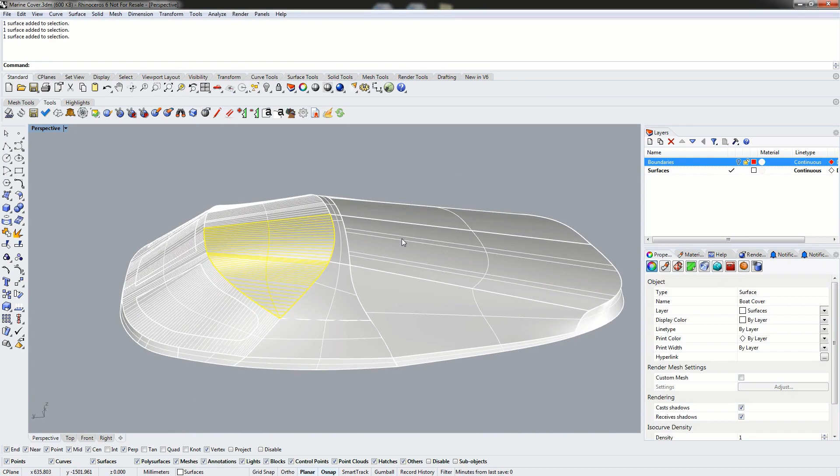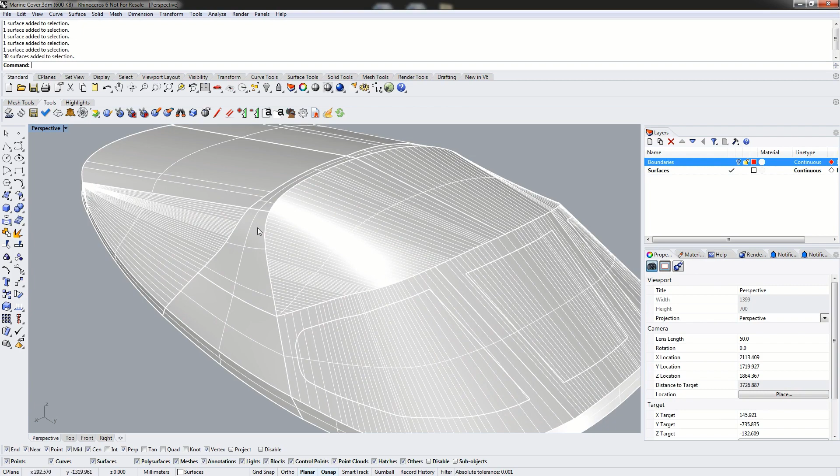This cover came in as a collection of surface objects, so our first step is to join everything together and create a single poly surface. Although we want to flatten this as multiple pieces, we're not just going to flatten surface objects. We're first going to create a mesh from it and then use the adaptive remesh to condition our mesh before flattening. So we're going to join all these pieces together to form a single poly surface object, and then create one single mesh out of the poly surface object. The reason we do it this way is so we have very clean preserved edges between all the different surfaces. If I were to select everything, we've got 30 surfaces here.

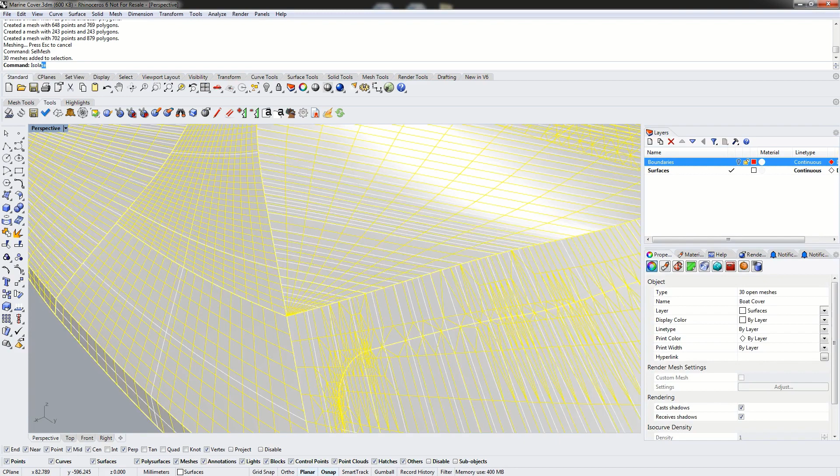If I were to create a mesh out of this, I'm just going to use simple controls, more polygons, and click OK. If we start to examine this mesh using SelMesh, Isolate, we're going to hide all the surfaces and just look at the meshes. If we look at the boundaries between these meshes, none of them line up. None of these quads are lining up when we mesh this separately.

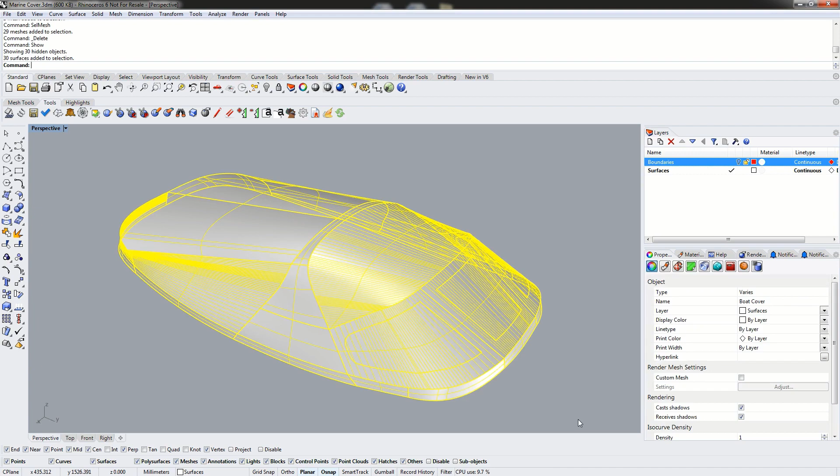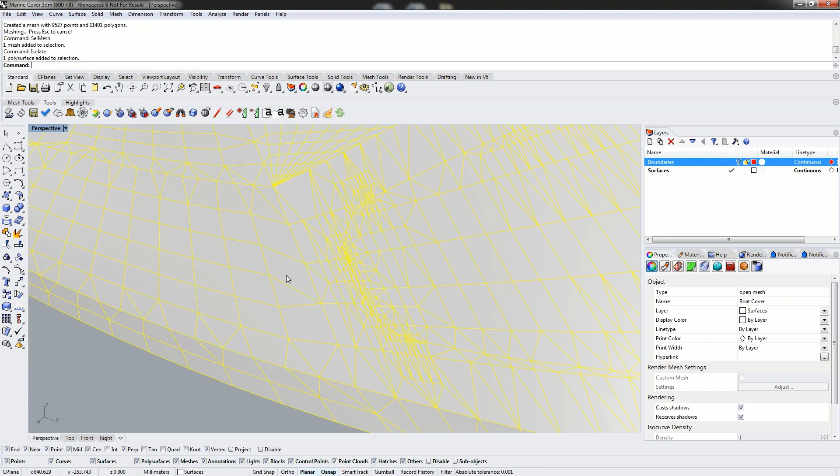The reason we join everything together - when we don't join it together, we don't have aligned boundaries. So we're going to join it together first, and now if we create a mesh, again using more polygons and clicking OK, and start examining the boundaries with SelMesh to isolate the mesh, everything lines up. So we've got a much better mesh now, and this is going to greatly improve the reliability of ExactFlat's sewing algorithms for when we create our new mesh using the adaptive remesh. ExactFlat will be able to recognize the boundaries, sew them together, and preserve those boundaries. That's why we join everything together to create a single poly surface first before we create a mesh.

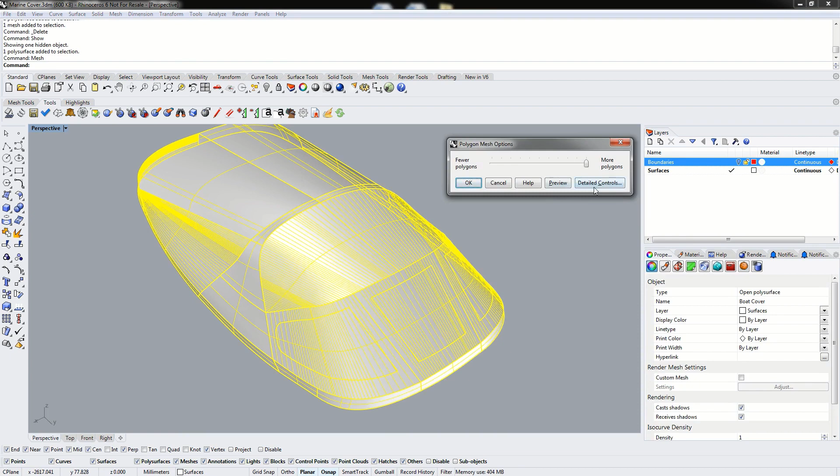So we're actually not going to keep this mesh here. There's a couple characteristics that I don't like about this mesh, so we're going to delete it. We're going to use show to reveal the surfaces again, and use the Rhino mesh tool again, but instead of using simple controls, we're going to switch over to detailed controls. This cover was modeled in millimeters, so as we move our mouse we can get an idea for the scale. We're going to manually set our meshing tolerances here.

As a general rule, I always set the maximum aspect ratio to 2. That just means our longest edge is going to be at most twice the length of our shortest edge on the quad or triangle. This helps to control and minimize high aspect ratio triangles. Just moving the mouse here, we're always going to start a little high. I'm going to set my maximum edge length to about 100 millimeters and my minimum edge length to 10 millimeters, and we're going to click preview.

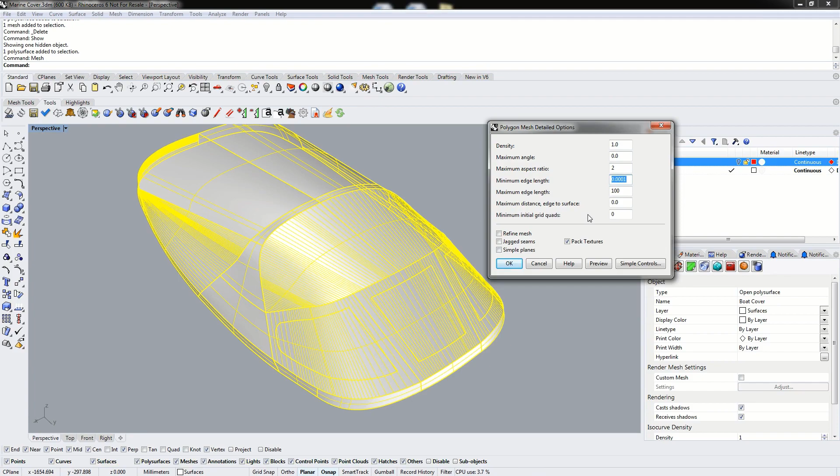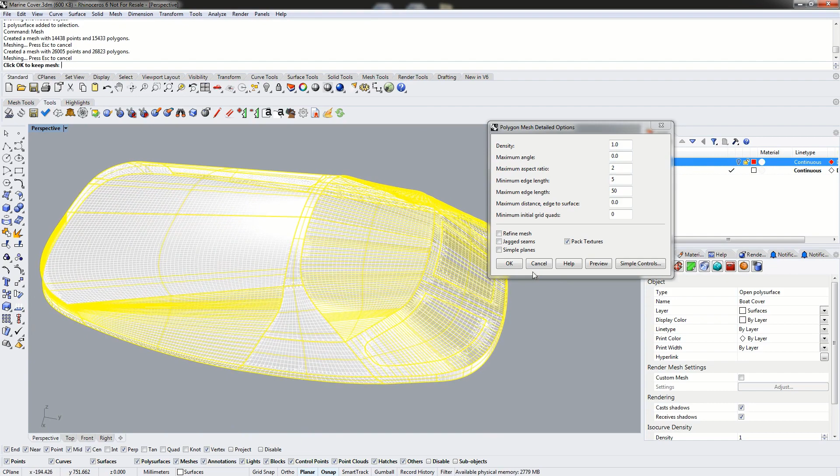This gives us an idea for whether we need to increase or decrease these values. I would like to see a few more triangles with quads along here before I use the adaptive remesher, so I'm going to change these to 5 and 50 - cutting them in half. We'll do the preview, and we're hopefully going to be doubling our triangle and quad count here. Our mesh is looking a lot better now already, so we're going to click OK.

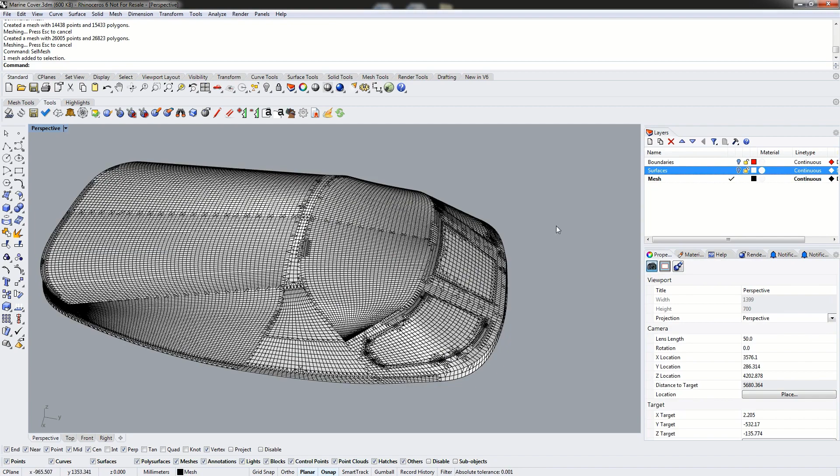Standard best practice is to always keep your different meshes and surfaces, any kind of work you do, on separate layers. So I'm going to create a new mesh layer here, use the SelMesh command to select my meshes, and change them to the mesh layer. Now I can turn off my surfaces and only view the meshes. So we've created one single mesh from meshing one single poly surface.

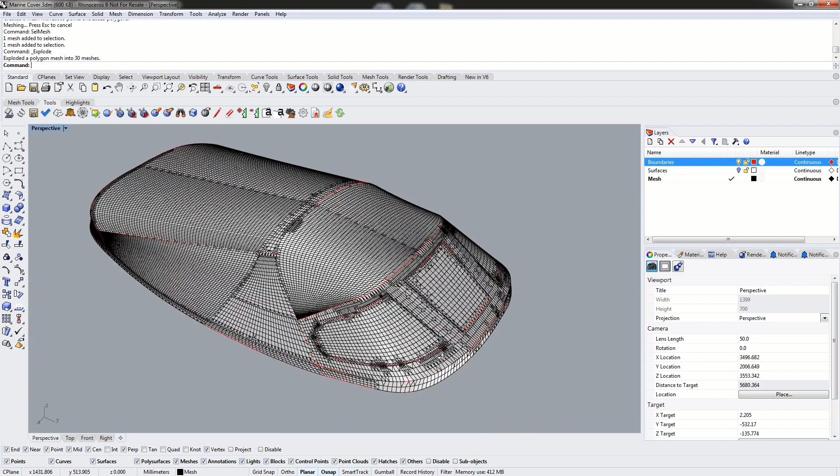So our next step is to explode this mesh so we can rearrange the pieces into component pattern pieces. Before we started looking at this, I duplicated the boundaries of where we want our pattern pieces to go, so we can highlight them in red, making it a little easier to select the pieces for creating our pattern. We can see our boundary right across the top here. So I'm going to start selecting my mesh and join these together as one single pattern piece, and we're just going to repeat the process for all the pieces that form our pattern.

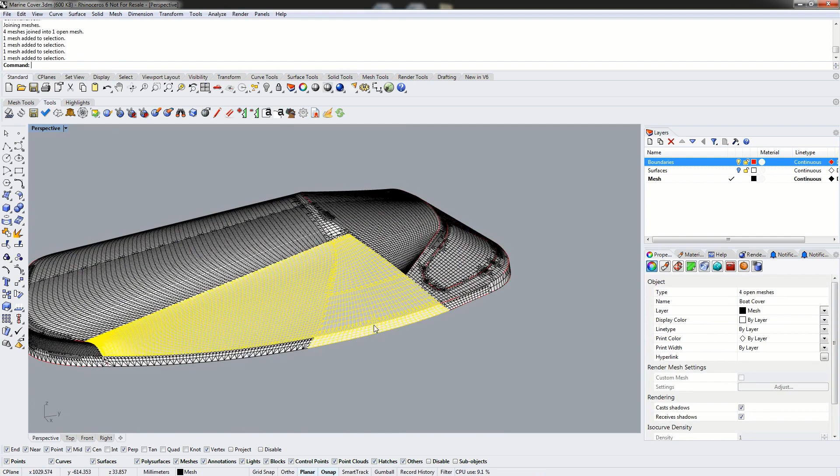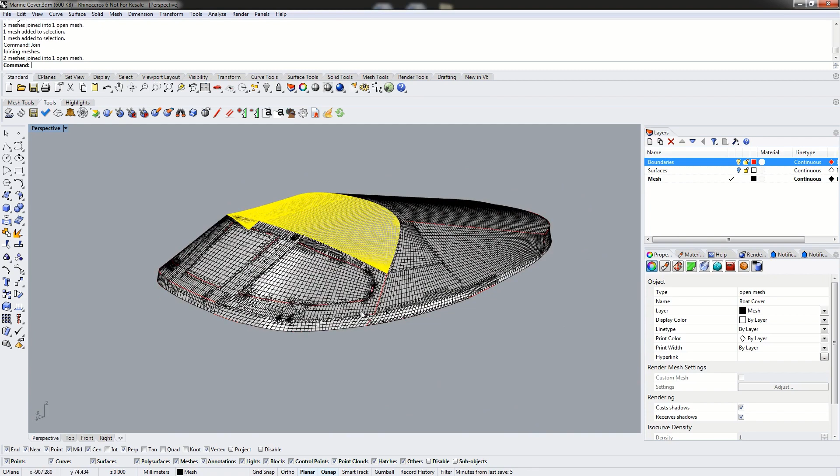Join those together, join these together. Join the right and left half of these together. And we're actually going to join all these together too. So this would be the windshield here. We can actually see where the cutouts are. And I actually identify these as a boundary that we want to keep.

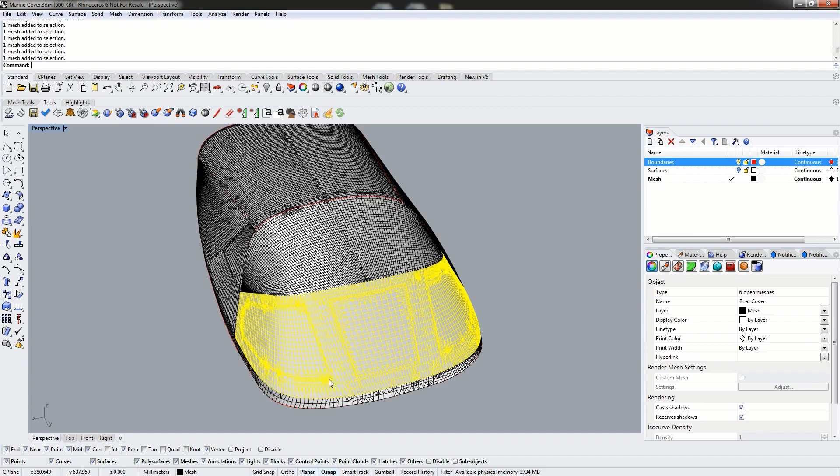However, for flattening, it's much easier to actually fill these in. And what we're going to do is we're going to use the ExactFlat trace command right here, and we're going to trace this boundary profile back onto the pattern piece after flattening. So for flattening purposes, we're going to join all of these together into one single sheet.

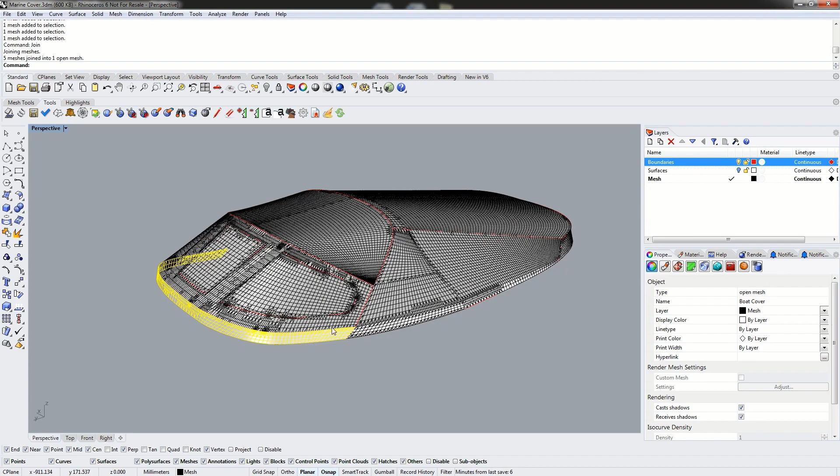And then lastly, we've got our pieces down here along the bottom. And we'll join these together as well. Now we'll just do SelMesh. We've got 7 pieces, which is what we should have. So we've got all our pieces joined together now.

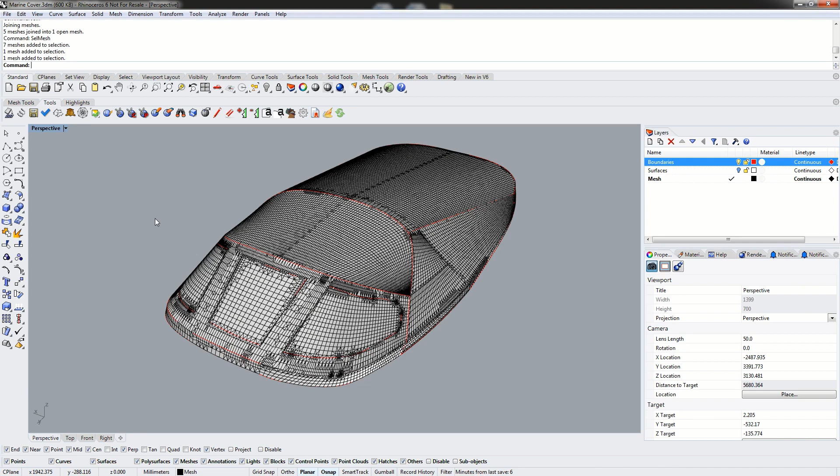So when we created a mesh from the poly surface, what happened is it created individual meshes for every single surface, and then it just joined them all together, very much the same way we did here. And because we had independent collections of vertices and triangles, one independent collection per surface, when we use the explode command, the command actually goes out and searches for those collections, and it's going to break them out into separate meshes.

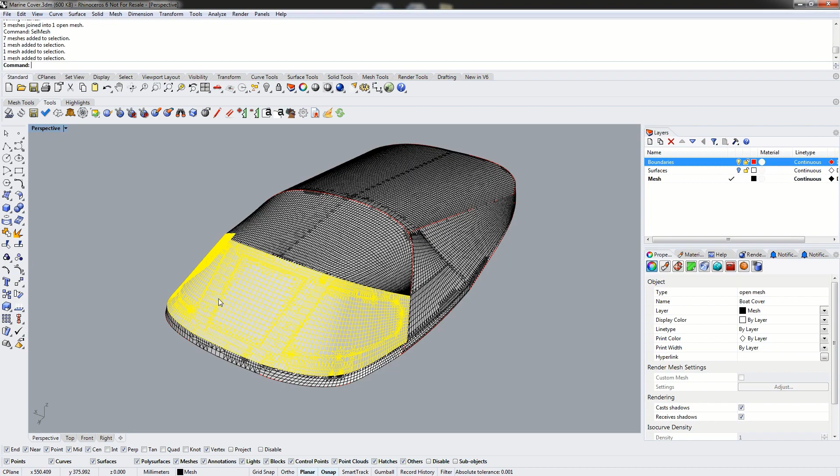So if I were to explode these, I would again explode them into 7 different meshes, or however many meshes we have here. And similarly, if ExactFlat were to try and flatten this, it would again explode them into the individual component pieces. So what we need to do is eliminate all the duplicate vertices and merge all these independent collections of triangles and faces into a single collection. And the way we do this is with the Rhino weld command.

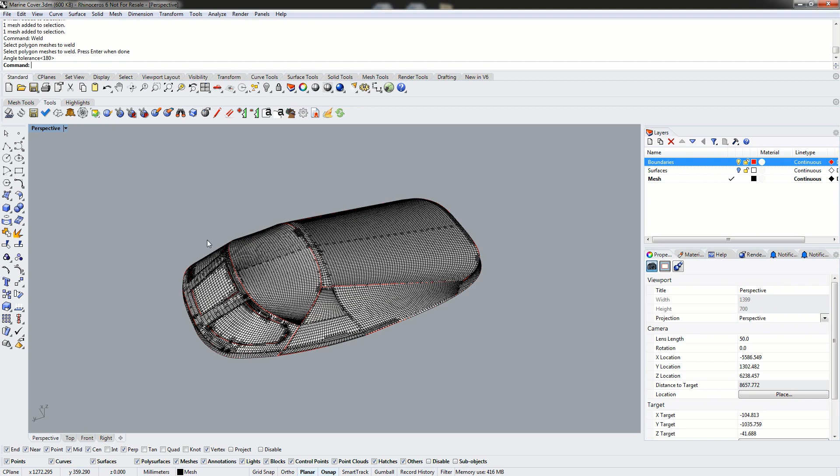So we're going to type in weld. We're going to select all of our meshes, and we're going to weld them all with an angular tolerance of 180 degrees. And what this is going to do is it's going to go through all our meshes, and it's going to find duplicate vertices, so 2 vertices within the same mesh container that occupy the exact same space and time, and it's going to merge them together into a single vertex.

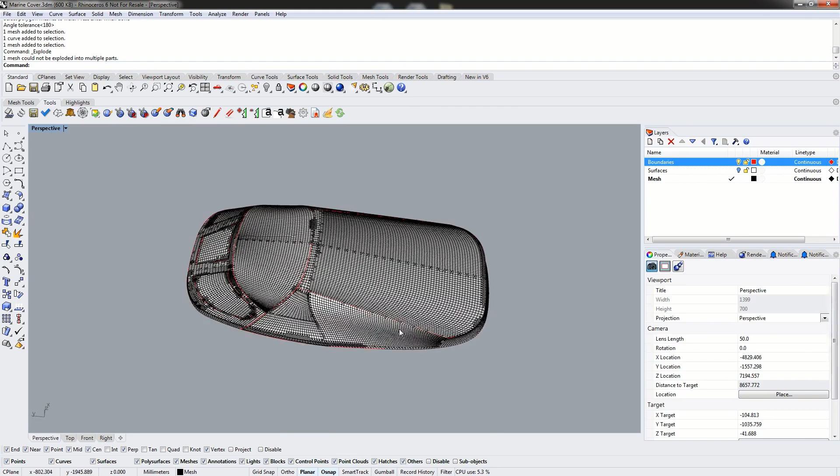So now, if I select one of my pieces here and try to explode it, explode's not going to work because I've merged all the duplicate vertices. We only have one unique collection of vertices and triangles now, which is what we want. So before we flatten these, as we look at them, we can see we've got mostly quads, and most of the triangles are the same size.

However, we do have some fairly high aspect ratio triangles, and we do have a lot of triangles that aren't really needed. So when we consider the back piece here, it's mostly flat. We have a lot of triangles or quads all the way down the back here. So what we're going to do before flattening is we're going to use ExactFlat's adaptive remesher to both decimate the mesh and to simplify the geometry of the mesh.

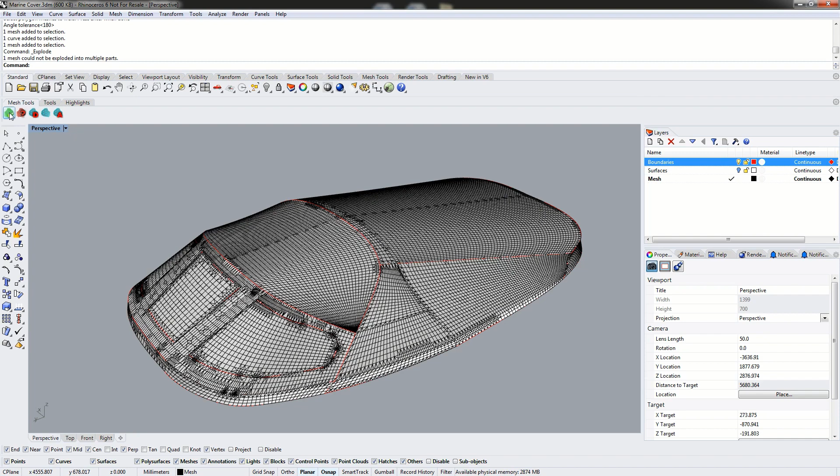So to do this, we're going to switch over to the Mesh Tools tab of the ExactFlat toolbar. And very first, we're going to validate the meshes. We're going to make sure we don't have any geometry problems such as geometrically degenerate triangles or topologically degenerate triangles. So we're just going to very quickly use the mesh validator, rectangle select everything, and it's telling us that all our meshes are valid.

If we did have a problem, that would have to be fixed before we can use the remesher, but we don't have any problems, so we're good to move on to the adaptive remesher. So we'll start the tool by clicking this icon here for the adaptive remesher, and again, we're going to rectangle select all our meshes.

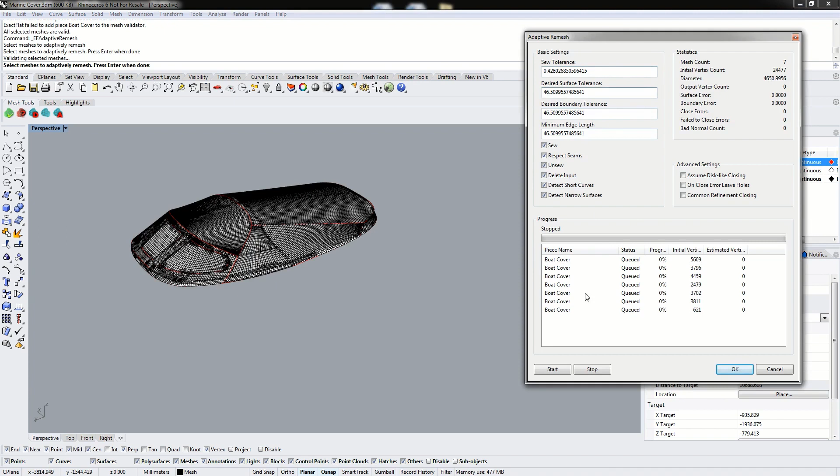Once the dialog comes up, before we change any settings, we're always just going to click the Start button, and this is going to give us a baseline. It's going to let us preview the mesh to see what the quality is. And if we need more triangles, then we can reduce the tolerances here. If we need fewer triangles, we can increase the tolerances.

So the way the tolerances work is, we've got surface and boundary tolerances. They're the maximum allowed distance between the original surface and the new surface created by the remesher. And it's the maximum allowed distance between the original boundary and the new boundary created by the adaptive remesher.

So if we need to preserve more detail, create more triangles. In this case, we've gone from thousands of triangles or vertices down to simply a couple hundred. Then we need to reduce the allowed distance. So in this case, we're going to reduce our distance to 30 for all our values here.

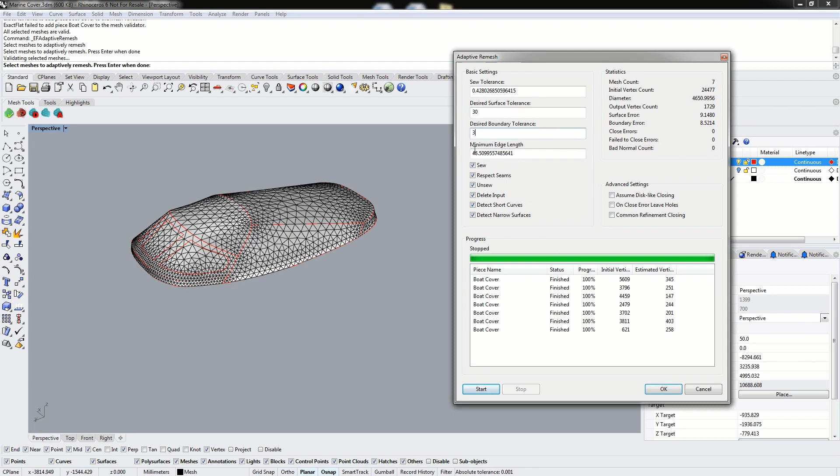We'll click Start again, and we're going to see meshes that now have more vertices. So we're preserving more detail. We can see we've got more triangles here, more geometry, and we're preserving more of this detail. If we reduce it even further, we'll do 10, 10, and 10. We're going to end up with even more triangles and vertices on our new mesh now.

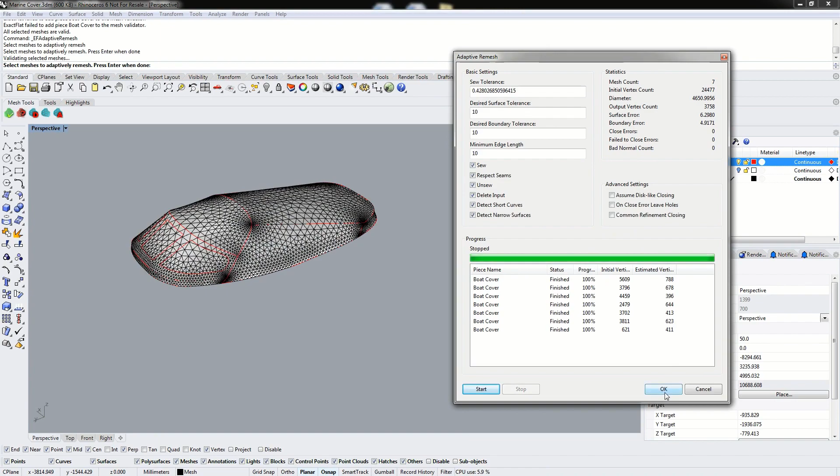So we'll go ahead and we'll click OK to accept changes. So at this point, it's safe. We can start flattening now. So to flatten these objects, we're going to switch over to the Tools tab of the ExactFlat toolbar, and we're going to click the Flatten command to start the flattening process.

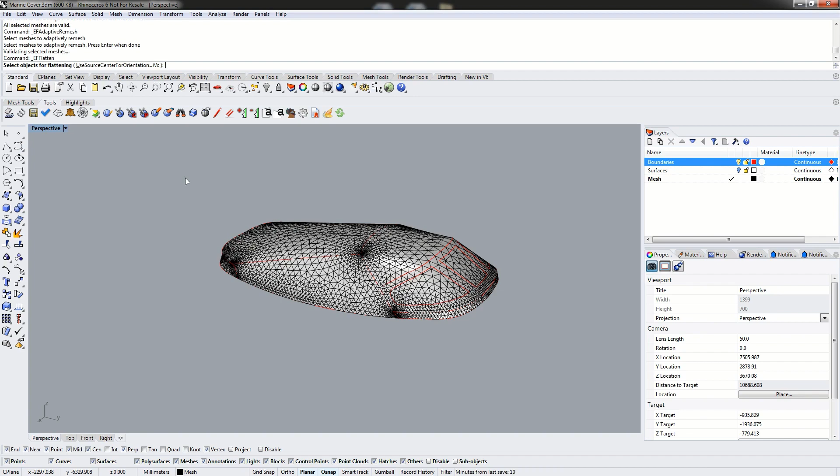So the flatten command is simply just one of our pre-flatteners. However, it is the entry point into the ExactFlat flattening process. So we always have to use the flattening command to start flattening things. The flattening command is going to create the flattening workspace, as well as use our press pre-flattener to create an initial unoptimized flat pattern.

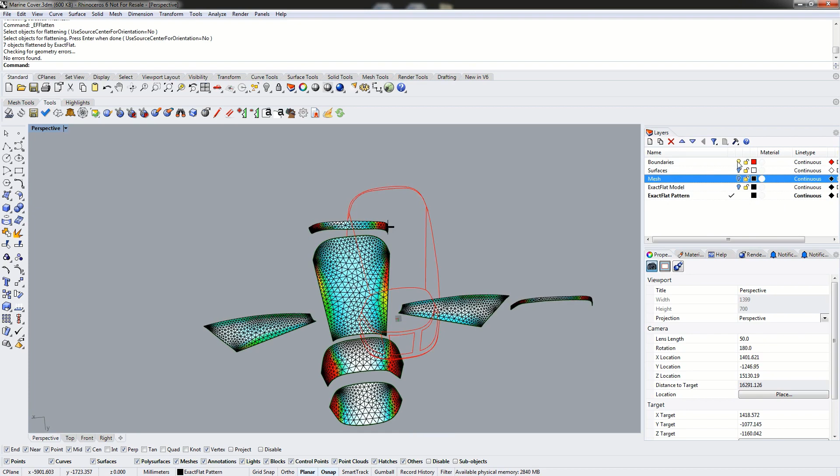So at this point, we're going to make our ExactFlat pattern layer the default layer, and we're going to turn off all the other layers because we don't need to see this information at this point. We're also going to minimize our perspective viewport by double-clicking on the title, and we're going to maximize our top-down viewport by double-clicking on the title here.

So we've already used one pre-flattener when we used the flatten command. We used the press pre-flattener to create our initial unoptimized flat patterns. However, when we look at these patterns, we've got flipped triangles on this one here, and for most of the pattern pieces we see red, which indicates we have high strain. All the colors on the pattern pieces represent the relative amount of strain on the pattern piece.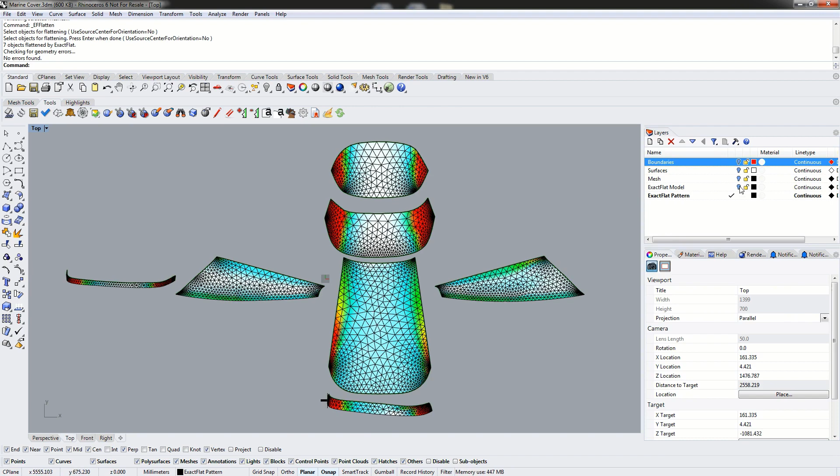And if we consider the 3D reference model, we can turn this back on and examine it at any time. So I'm just going to switch back to our 3D perspective viewport. So we've always got a reference model and a 2D pattern, and the strain is always the same on the reference model as the 2D pattern. So we can see where our areas of high strain are on our pattern pieces.

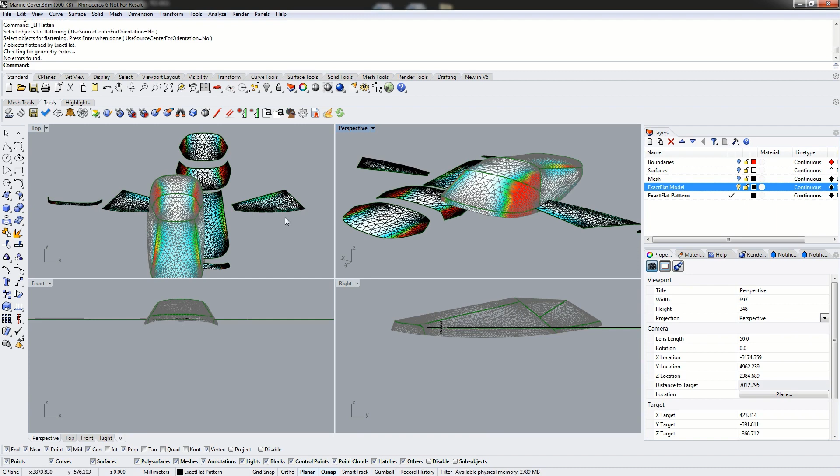So if we consider our 3D model to be a rigid shell, the strain represents how much we're going to have to stretch and pull the 2D pattern pieces to get them to fit back onto the 3D model. So in this case, we have high strain on all of our pattern pieces, which needs to be dealt with.

So really, the goal of the optimizer is to reduce the strain and average energy density to as close to 0. But because ExactFlat is a two-stage flattener, we have two different sets of tools for doing this. So we've got our pre-flatteners, which are the very first tools that are used, and our flatten tool does use one of the pre-flatteners to create the patterns. They're very, very fast tools, and their goal is first and foremost to remove flipped triangles.

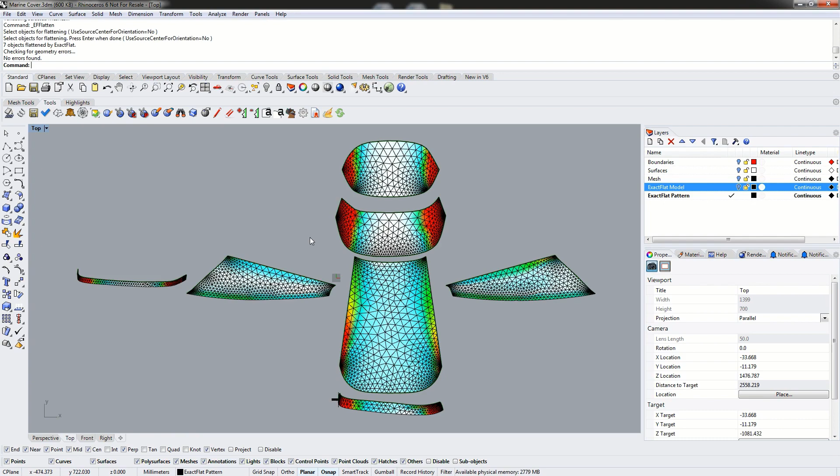So when we look at this piece here, we can see we have flipped triangles here, and these are just triangles that are folded in under themselves to create a fold or a wrinkle. And the second goal of the pre-flatteners is to reduce the strain on the pattern piece and eliminate a lot of the red coloring. So we can do this with any of ExactFlat's pre-flatteners. We've got our fracture pre-flattener, our pelt pre-flattener, and we've got our CCM pre-flattener.

So for these pieces, I'm just going to start with fracture, and as I start selecting edges, we're going to get a different pattern piece for every single selection point. So the biggest goal here is just to remove flipped triangles and to reduce the strain as much as possible.

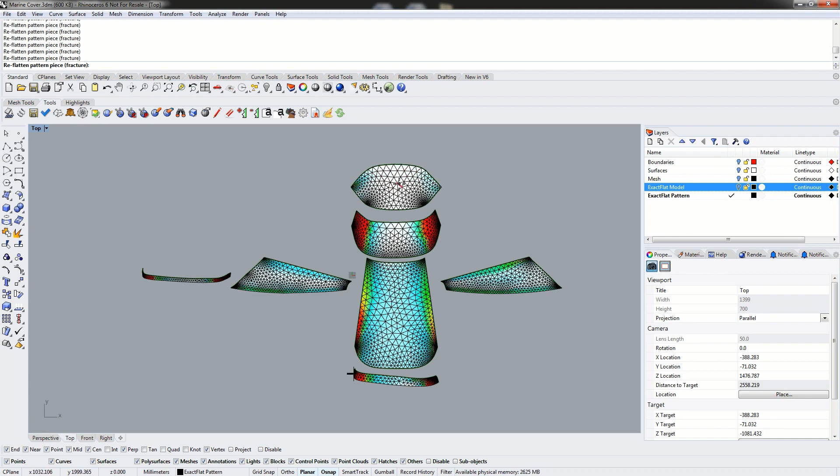So you don't have to spend a lot of time clicking around getting the absolute best pattern. So long as you don't have flipped triangles and you don't have a lot of strain, that's a good starting point. So again, we'll do this with this next piece. There weren't any flipped triangles, but we've expanded the piece and we've eliminated a lot of the strain. The same for over here, and because this piece is actually near developable, in this case we ended up with a pattern that is very, very close to the perfect pattern.

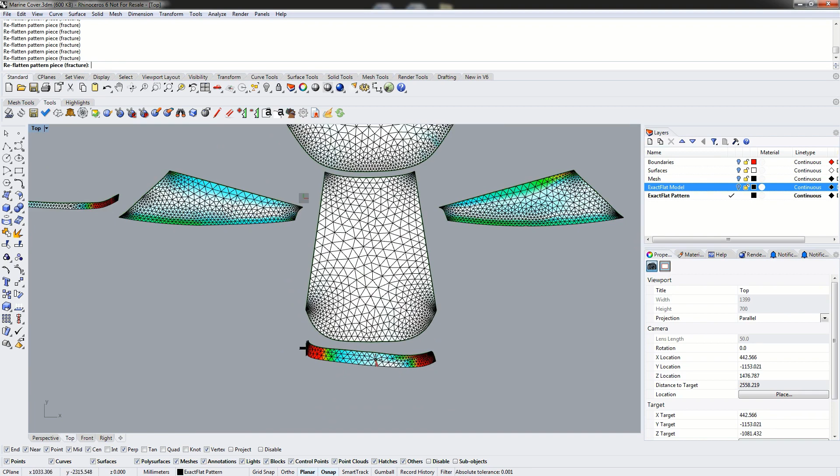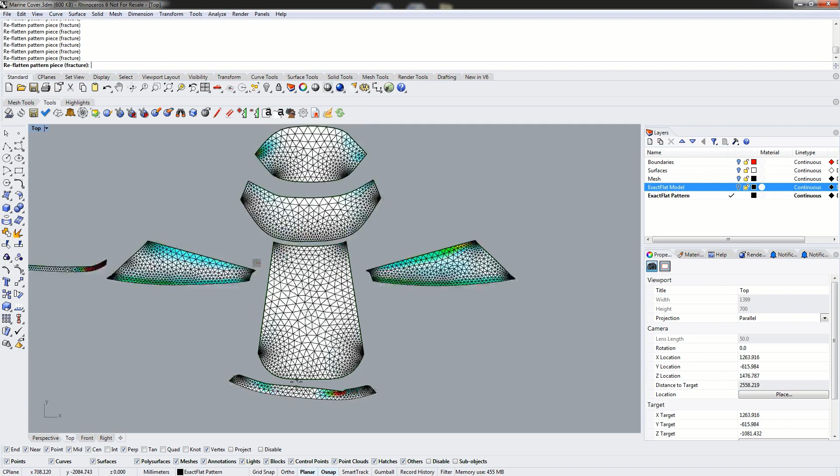So we'll just repeat the fracture process on the remainder of the pieces, and for this one down here, by fracturing it, we've eliminated the flipped triangles as well as reducing the strain. We still do have quite a bit of strain in this area here, but because of the nature of this piece, it's a very thin piece. This is probably more of a local anomaly than anything, so we're not going to worry about it. The optimizers will succeed in removing the strain. So we'll just fracture the remaining pieces here, and now we're good to go.

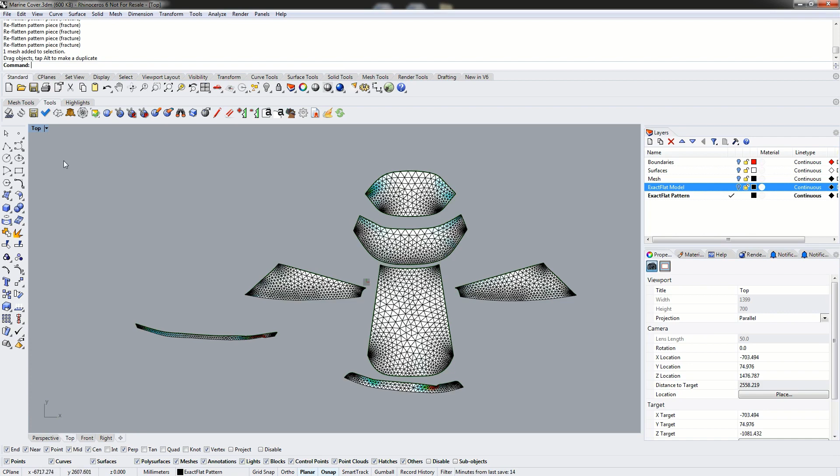So by using the fracture algorithm, we've spent very, very little time, and we now have pattern pieces that are very close to final pattern pieces. So we've greatly reduced the amount of time that's going to be required for the optimizer to optimize these to the final pattern. So now we're going to go ahead and optimize the pieces. We're going to select all our pieces here, and we're going to press enter on our keyboard.

So at this point, we are now looking at the spring settings. We're going to leave all of our settings at defaults, and we're going to use a simple cotton for optimizing this pattern. If we do need to use a different material, we can click the Browse button to open up the ExactFlat material browser, and we can select from one of ExactFlat's 85 default materials. If there isn't a material in the library that suits your needs, then we do have the ability to add custom materials to the database.

You can either measure the mechanical properties of the material yourself, or we do partner up with a university, and for the cost of about $25 US, it usually takes about 5 business days. They will be able to measure the mechanical properties of your material for you. I believe you only need to send about a 1 foot by 1 foot swatch of material, and once they're done measuring the properties, they will send you back a report which you can then use to create your own mathematical model of that material in ExactFlat for your private use.

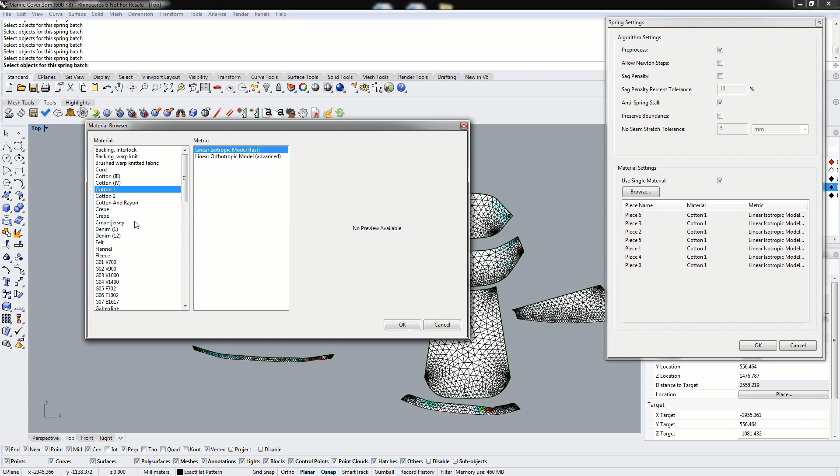So once we select our material, we just click OK, and now we're going to start the optimization process by clicking the OK button. So as ExactFlat optimizes the pattern pieces, we're going to see, not so much with this pattern because we're very close to optimal pattern pieces already, but for these two pieces down here especially, the shape is going to change and the colors are all going to change more towards white.

So as I've already mentioned, the colors on the pattern pieces represent the amount of strain on the pattern piece. The default ExactFlat legend has white representing 0 strain, cyan or blue representing 5% strain, green is about 10% strain, yellow is 15%, and red is 20% or more.

So as we optimize the pattern pieces, we're reducing the average energy density, or in the case of these pieces, we're actually expanding the pattern piece, we're adding material, and that's how we're reducing the average energy density. So because we're adding material and reducing the energy density, we're reducing the strain. We can see this being reflected in the strain analysis by the colors all changing from red and yellow towards blue and mostly white.

So a couple ways we know that the patterns are a good fit. The primary way is simply by looking at the color of the pattern piece. When we see the color changing towards white, we know we've got a very low energy density on the pattern piece, and because we've got very low strain or energy density, that's going to be a good fit. Another way we can tell that we have a good fit is by looking at the average energy density in the ExactFlat report.

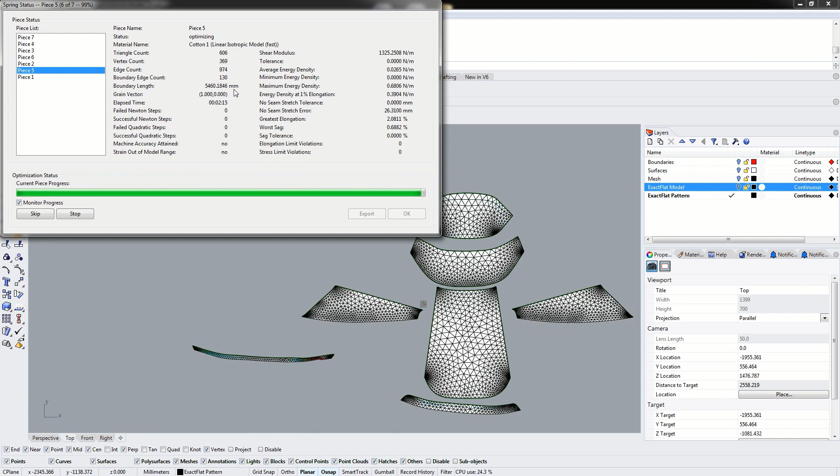So a couple things to look for as far as the boundary length of the pattern piece. So for this piece here, our boundary length is about 5,500 millimeters. And we've also got our no seam stretch error. So I'm just going to switch back to piece 5 for this one here. So we've got 5,500 millimeters for the perimeter length, and our error is 26 millimeters. So what this error represents is when we compare the perimeter length of the 3D model piece and the perimeter length of the corresponding 2D pattern piece, the no seam stretch error is the difference between the two. So when we compare 3D to 2D, our perimeter length difference is about 26 millimeters.

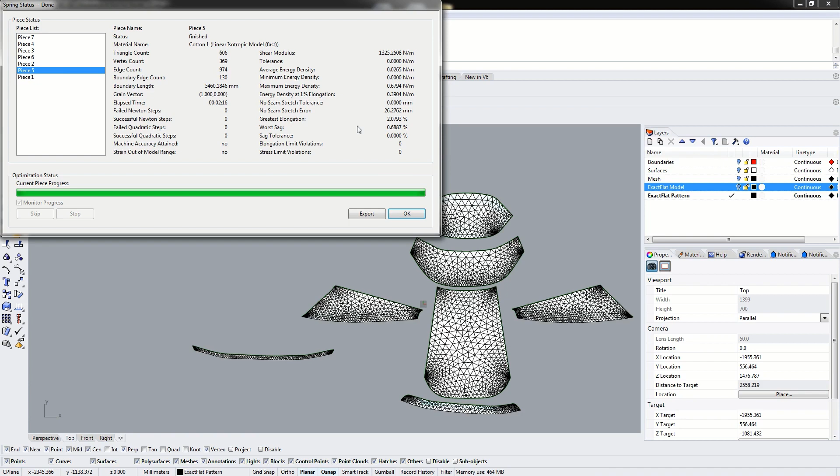And when we consider that our error is 26 millimeters out of 5,500, that is a very, very small error. That's less than 1% error. So this is distributed around the entire perimeter. So when we go to sew this back together, just because of the stretch of the fabric, this error is going to be very, very manageable and not noticeable. So if this still is too much of an error, we do have some options that we can set in the spring settings, specifically the preserve boundaries option, and that's going to help to further reduce the no seam stretch error at the expense of adding additional strain to the pattern piece.

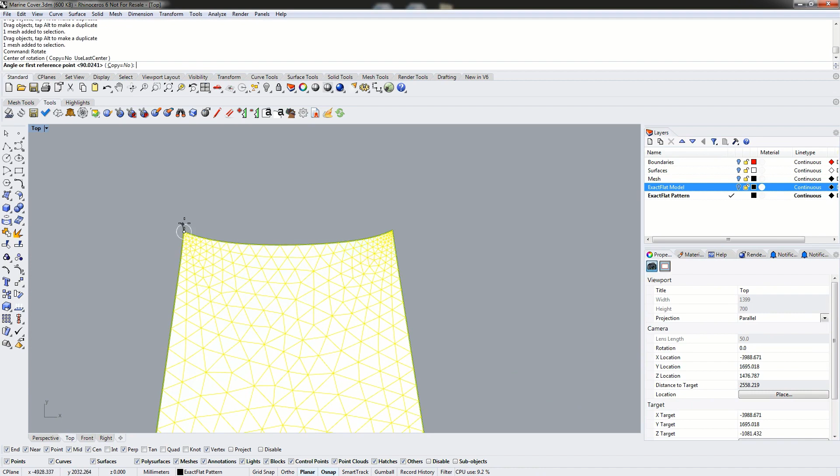We're going to go ahead, we're going to click OK, and now we're going to rearrange our pattern to make it a little easier to see where everything goes. So we're going to start with this piece here as the big long piece at the back, and what we're going to do is we're going to first rotate it. It looks like it's already in the correct orientation, but we're going to rotate it anyway. So we're going to use these 2 points as our reference, and I'm just going to hold Shift on the keyboard to snap my point along the horizontal x-axis, and we're going to rotate this so it's perfectly horizontal.

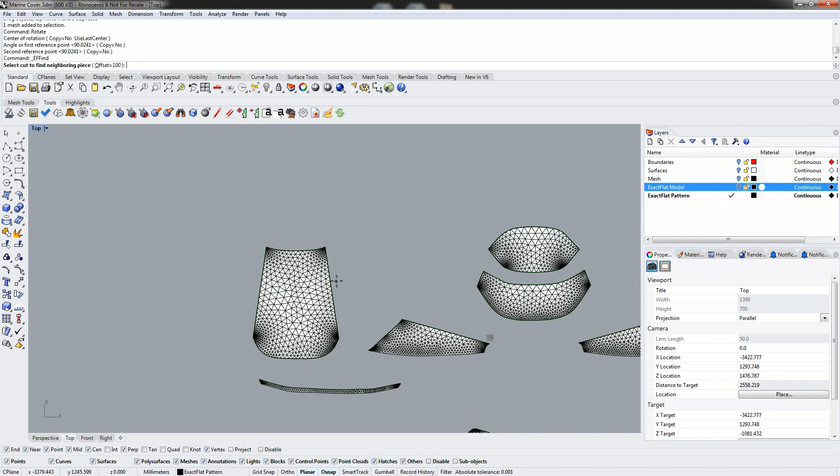Next, I'm going to use the ExactFlat Find tool to find all the neighboring pattern pieces, and the Find tool is going to allow us to rotate them and snap them back to where they should be. So we'll notice as I move my mouse along the edge here, we're seeing a highlight here, and if we look at the far right piece, we can also see a corresponding orange highlight. So that's telling me that those two edges match up. So if I click on this edge here, the far right piece is going to rotate and move to match my selection point here. So using the ExactFlat Find tool, we can very quickly find and recreate our pattern.

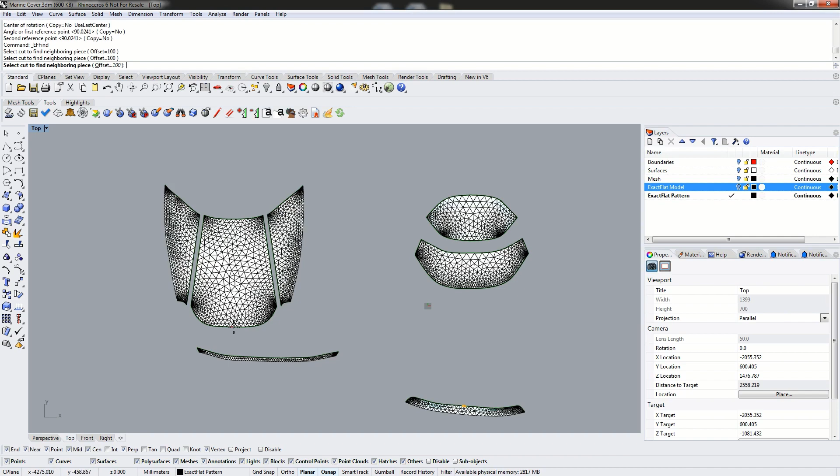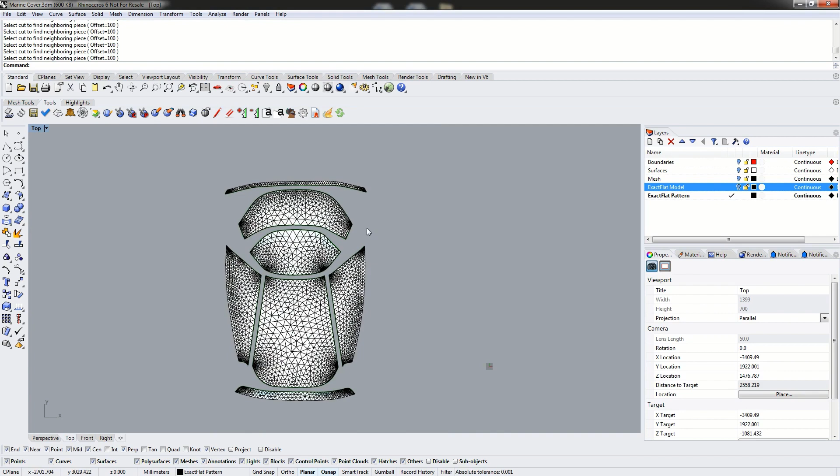So when we look at the front windshield, we flatten this as a single piece, even though we do have cutouts for the windscreen. So to add these cutouts, we're going to use the ExactFlat Trace tool, and in order to do this, we need to go back to our 3D model. So we're going to turn on our 3D reference model, and we can see it down here to the right. And to make it easier, we're going to go back to our perspective viewport.

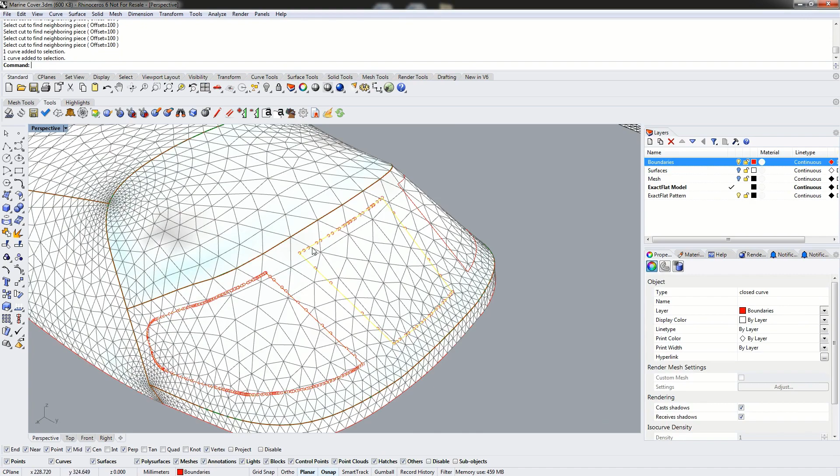So now we have our 3D reference model over here on the left, and we have our pattern over on the right. We also have our original layer with the boundary curves that we created, and on this layer we have 3 curves that were right on the surface, indicating the location of our windshield cutouts.

So what we're going to do is we're going to trace these 3 curves onto this pattern piece, and we're going to do this using the trace command. So for all Rhino commands, including ExactFlat commands, the command line is always going to tell you what is expected of the command. So right now, after starting the trace command, it's telling us to select one or more objects to trace. So we're going to select our curves here that represent the cutouts for the windshield. We're going to press enter when we're done selecting our curves.

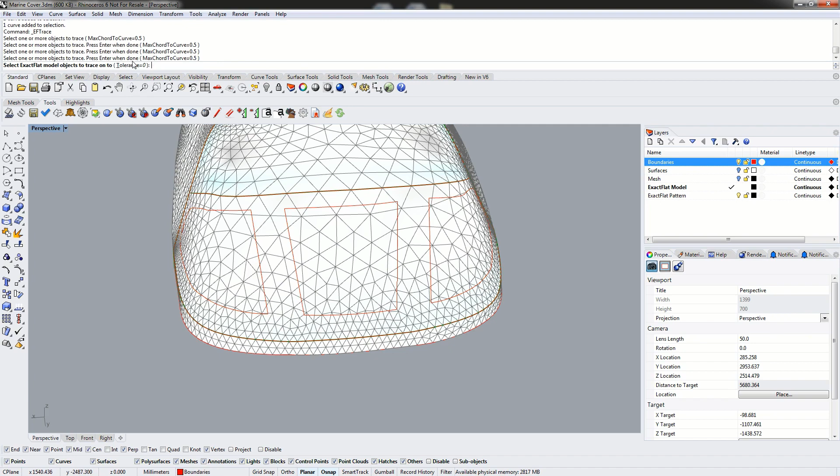Next, it's telling us to select the ExactFlat model objects to trace onto. So this is our target for a trace. So we're going to choose our front windshield here, and we're going to press enter. This dialog appears when we're converting a curve or a spline into polylines, and this is just giving us a preview for how many vertices. So this is basically our fidelity for the trace curve.

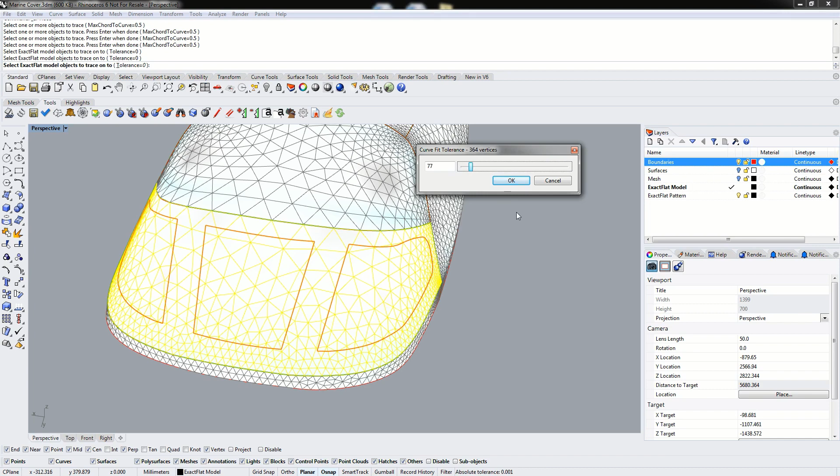So if we move the slider all the way to the right, we're going to have less fidelity or fewer vertices. If we drag it all the way to the left, we're going to have a lot more vertices. So we're just going to aim for something around 300 vertices or so, which is more than enough to do the trace. So we're going to go ahead and click OK. And ExactFlat is now tracing these curves onto the 2D pattern. So if we zoom out, we can see that ExactFlat has in fact traced them on. So to make this a little easier to see, we're going to switch over to the Highlights tab of the ExactFlat toolbar, and we're just going to turn off the edge highlight.

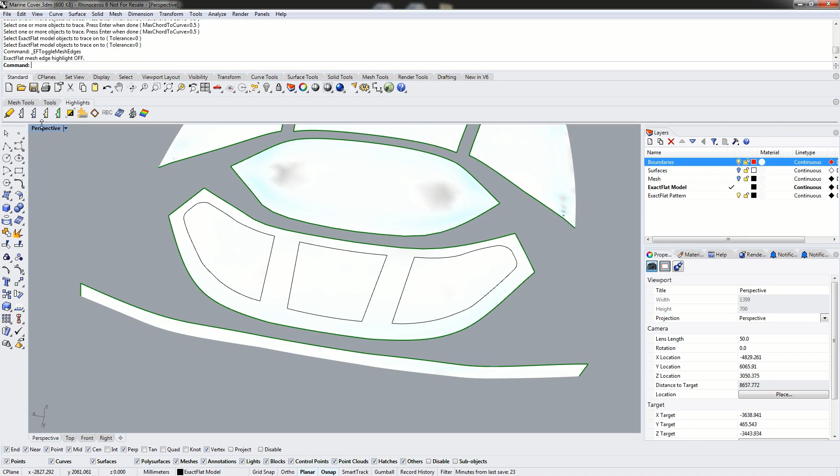So now that we've traced our curves onto the pattern, we can go ahead and start adding notches to this pattern piece. So we're going to go back to our top viewport, and we're going to hide our model again by making the ExactFlat pattern the default layer. We're just going to turn off the pattern, turn off the model, and turn off the boundary curves.

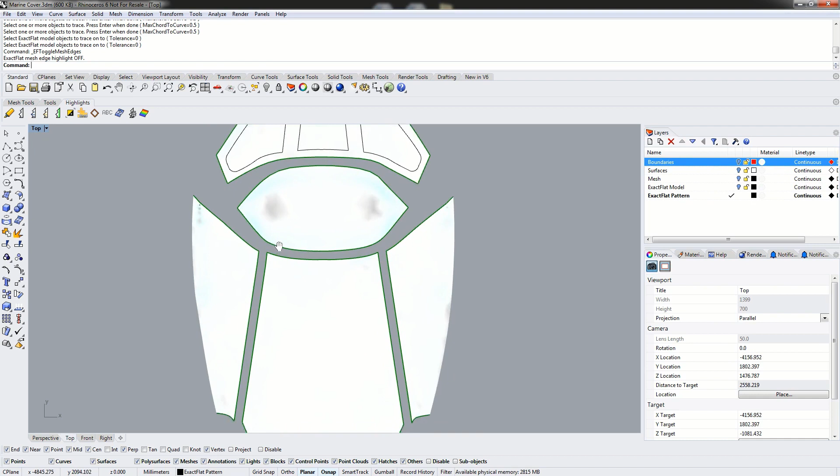So now we're going to use the ExactFlat notch tag tool. We're going to switch back to the Tools tab of the ExactFlat toolbar, and we're going to turn on the notch tag tool. So we're just going to use the default settings for the notch tag, and what this is going to do is create a simple slit notch. It's going to create it the entire length of the seam that we're adding, and our tag is just going to be a single auto-incrementing unique number, starting from 0 going all the way up to however many notches we add.

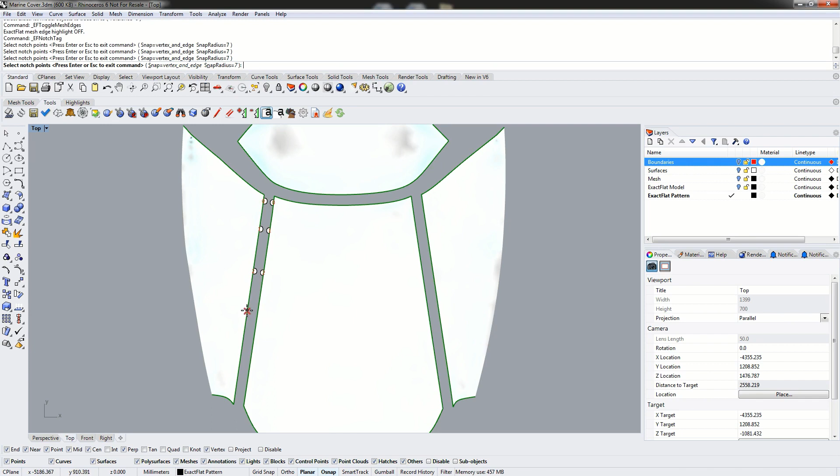So we're going to click the Add button. It's going to hide the dialog, and now we can start selecting locations on the edges here. So we'll notice as we select a point on one side, we're actually creating 2 notches. We're creating one on the left-hand side as well as the right-hand side of the seam. So this greatly assists with the sewing process. It allows us to ensure that the right and left-hand side are being sewn together at an even rate.

So once we're done adding all our notches, we can go ahead and create a DXF, or we can just work with our pattern in Rhino. So once we've flattened the pattern pieces, you're not forced to use the ExactFlat patterning tools, although we do have patterning tools such as piece tags, notch tags, and our trace tools. You're not required to use them. You can simply bring this pattern into another package such as Optitex or Gerber AccuMark. So the easiest way to do that is to create a DXF.

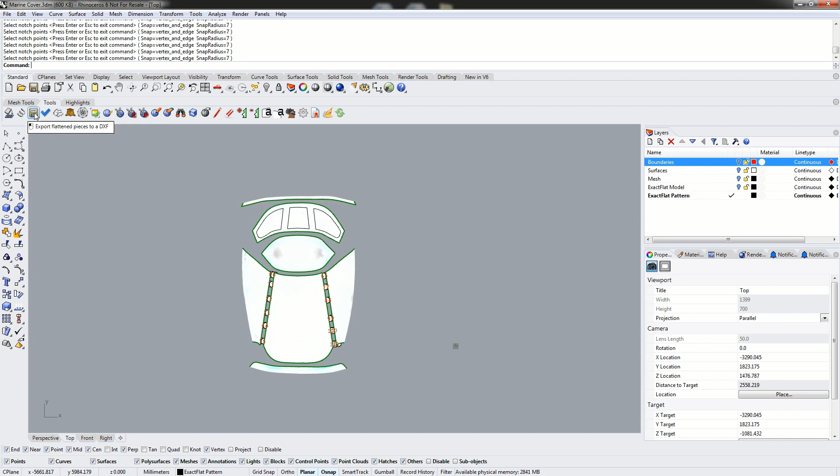And we can do this simply by clicking the DXF icon in the ExactFlat toolbar, and this is going to ask you to choose a location and a file name for creating a DXF. So we're just going to go to our demo folder here, the marine cover, and we're just going to create this DXF called boat cover.

So we've created our DXF, and now I'm going to import this DXF into the document here, and we'll have a look at the file structure of the DXF. So I'm just going to use the import command, and we'll import our boat cover.

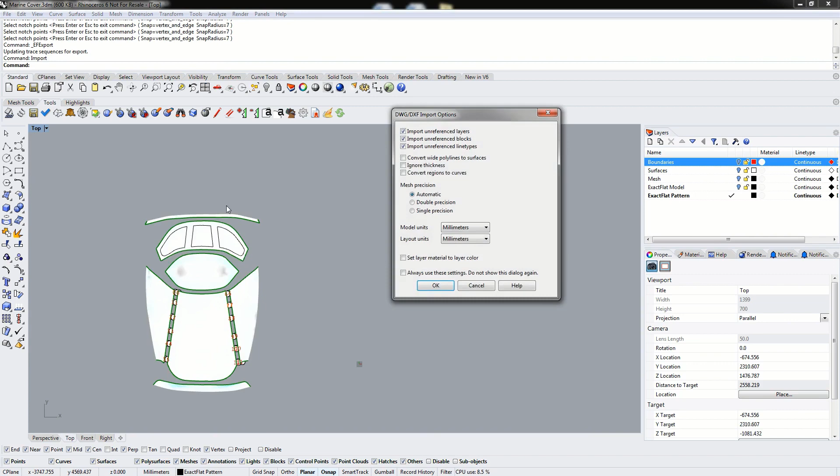Now we can see the DXF that we've created. On our pieces here, our DXF is comprised of multiple layers. If we look at the layers, we've got a grain layer, cut layer, seam layer, notch tag, and we also have our traced lines layer.

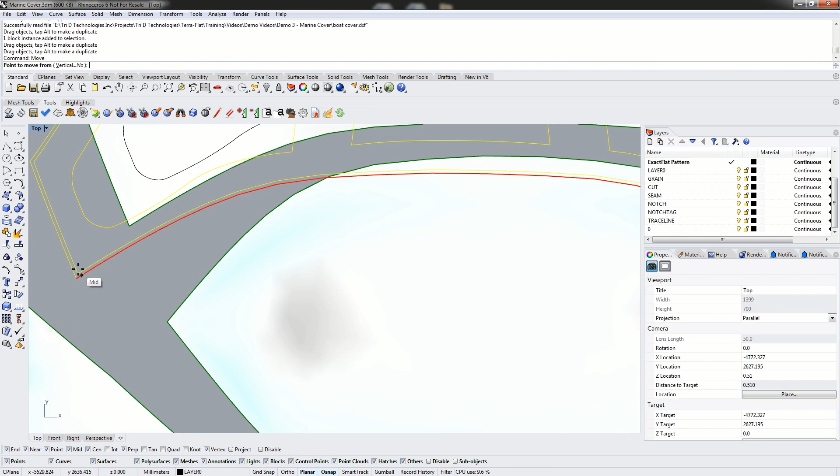This is because we traced the profile of the window cutouts onto this pattern piece as well. So we'll drag one of these pieces over here using the Rhino move command, moving this piece from the interior point right here so that it's perfectly aligned.

When we look at this piece, our blue line represents the perimeter of the pattern piece, so this is our sew line. We also have an optional red line here, which represents our cut line. This is the sew line plus whatever seam allowance we have configured in the ExactFlat options.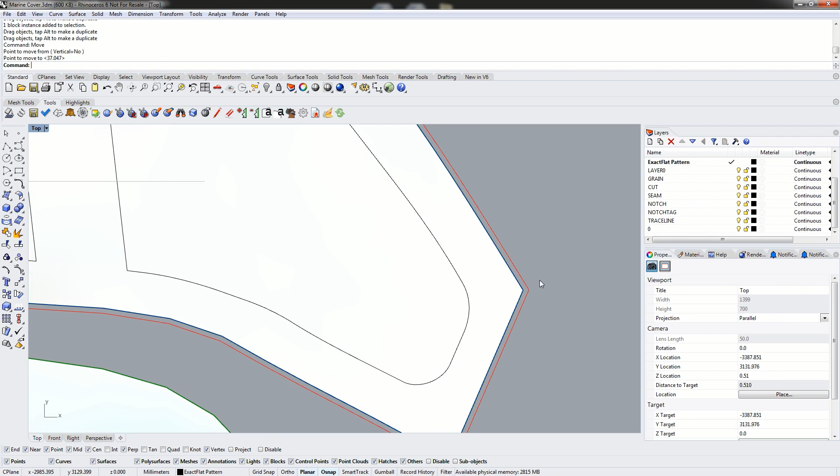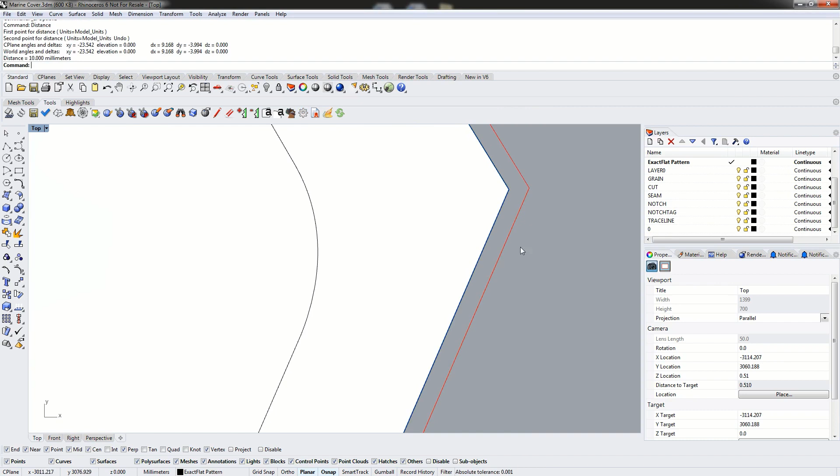If we look at our ExactFlat options, we'll expand the ExactFlat tab and go to the DXF export tree item. Our DXF seam allowance is set to 10 millimeters right now, so if we measure the distance between our seam line and cut line, it should be 10 millimeters. We'll do the perpendicular measurement, and we've got a 10 millimeter difference here.

So our blue line is our seam line, or the natural perimeter of the pattern piece. Our red line is our cut line, which is the seam line plus our seam allowance. We also have a gray line here, representing our grain line. In this case, because we didn't manually specify a grain line using the ExactFlat grain line tool, the grain line is assumed to be the horizontal x-axis. You can rotate your pieces however you need to before exporting a DXF, and you can safely assume the horizontal x-axis is always going to be the grain direction.

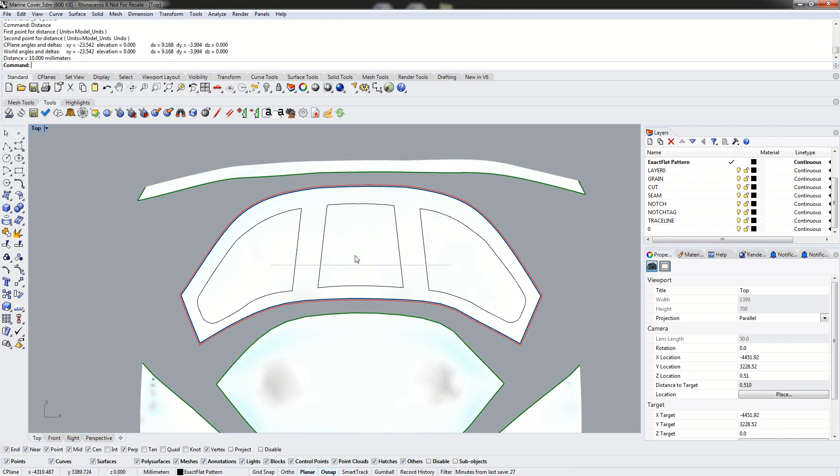One benefit of the DXF export is because we have so many layers, when we import this into another system or even our cutting table, we can simply turn off the layers that are not needed. In terms of a cutting table, we can assign different tools to different layers. We might want to assign a pen tool to the seam layer, that way we're penning out where we need to sew to help with the sewing process. We may want to assign a wheel cutter to our cut layer to cut out the perimeter.

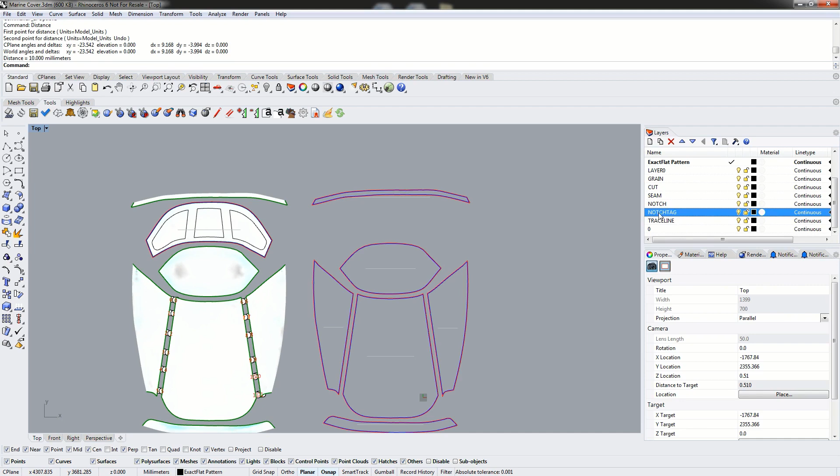We may want to assign a drag knife to our notch layer to cut out the notches, and we may want to simply turn off our notch tag layer, or we could assign a pen tool or an airbrush to our notch tag layer to actually pen out the tags that are created for the notches here.

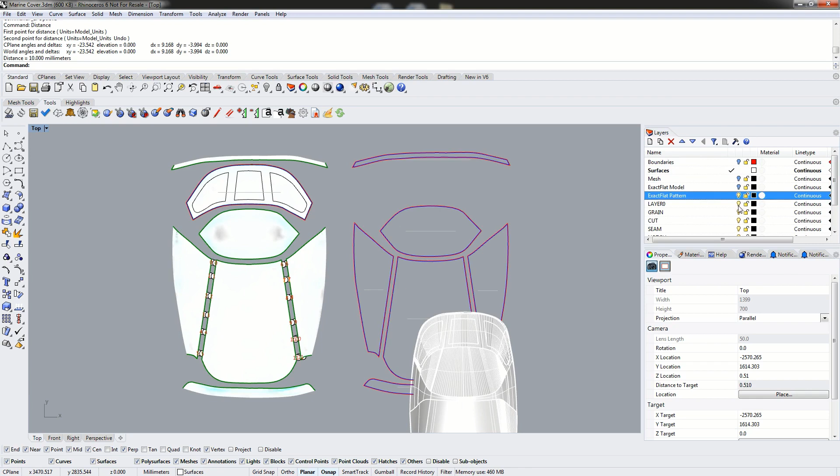This has been a demo showing how to flatten a marine cover. To summarize, we started out with our surface, and once we had our surface, we went ahead and joined our surfaces together into a single poly surface, and then we created a mesh from it.

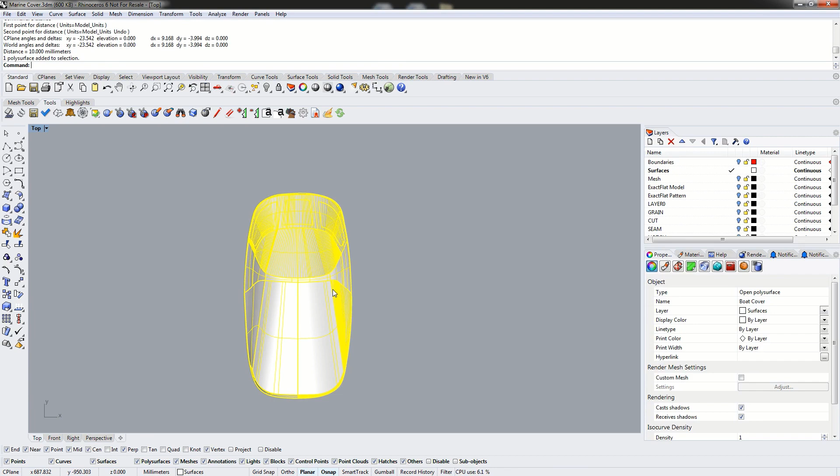The reason we do this is to ensure that all the boundaries between individual surfaces, when we create our mesh, are aligned in terms of mesh vertices. So we created a mesh out of our surface and went ahead and remeshed it. Once we remeshed it, we flattened it using ExactFlat and created our pattern pieces.

Once we had our pattern pieces, we used the ExactFlat pre-flatteners. Specifically for this one, we used the fracture pre-flattener to remove as much strain as possible. After that, we used the ExactFlat optimizer, the spring tool, to reduce the average energy density to as close to 0 as possible.

We then used a combination of the Rhino rotate and move tools to move one of the pieces, and then used the ExactFlat find tool to find all the neighboring pattern pieces and snap them back to the correct location. We then used the ExactFlat trace tool to trace the location of the window cutouts onto the pattern piece, and the ExactFlat notch tag tool to create notch tags. Finally, we used the ExactFlat DXF export tool to create a DXF for the pattern piece.

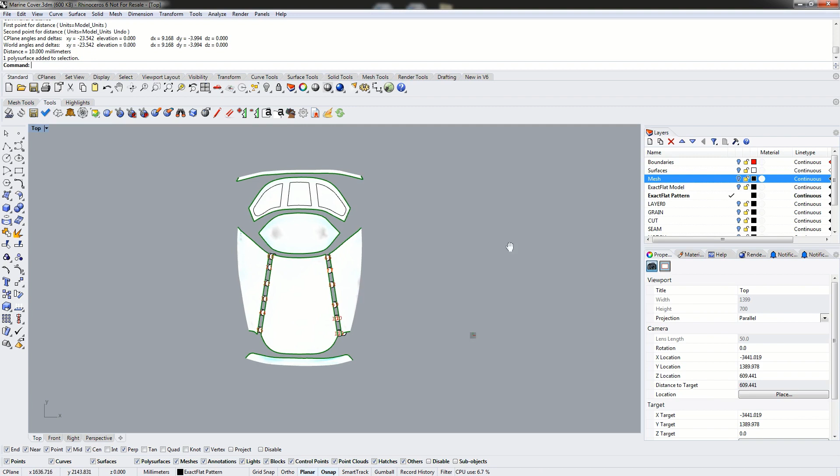And that is what we've imported into the document for comparison.